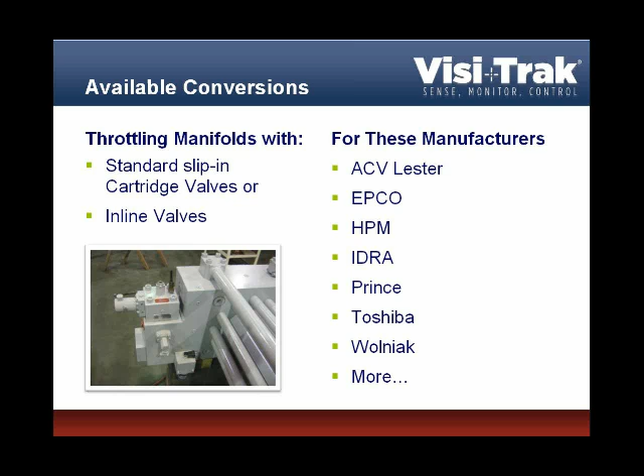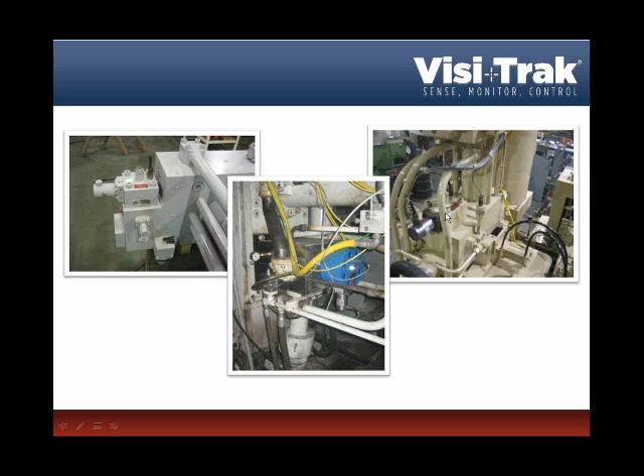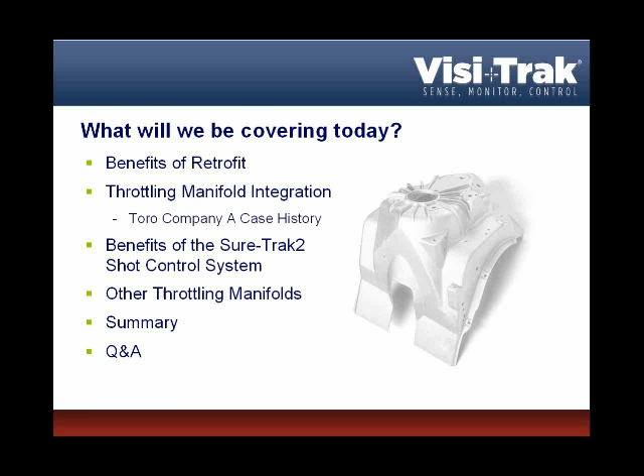Today we'll cover the benefits of retrofit from both a performance and a business standpoint. We'll look at a case history of a throttling manifold integration done at a Toro die casting facility. We'll talk about the benefits of shot control, look at some other throttling manifolds we have done, and a brief summary, and then if there are questions, we'll try to answer those.

Performance benefits: you can get an increase in shot speed capability from new throttling manifolds. It doesn't always happen, but it's not uncommon for there to be a speed increase. The efficiency of the cell is increased. Scrap typically is decreased, and with the ability to control acceleration and deceleration, we can minimize the impact force, reduce flash, and reduce wear and tear on the tooling and the die casting machinery.

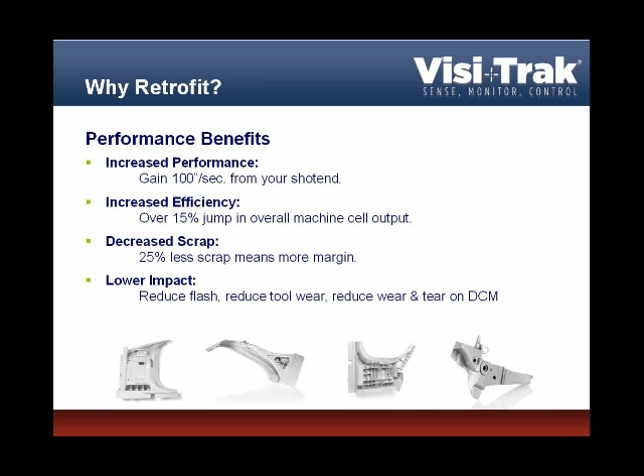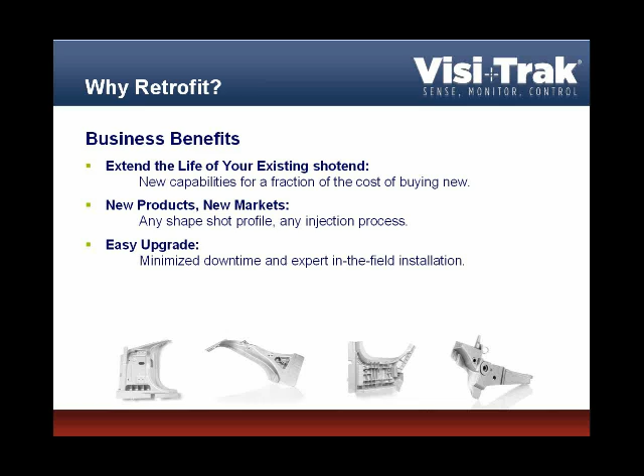From a business standpoint, it's far cheaper to enhance the capability of an existing shot end than to replace it. Once the shot system has an integrated throttling manifold and shot control system, it's now capable of any die casting process, squeeze process, or vacuum-assisted process. And these are easy upgrades, field retrofittable.

Let's talk about the Toro company, who has a manufacturing facility in southern Minnesota. It's a very high volume operation. It's been there for about 20 years, and like most plants, if you started out with a clean piece of paper today, it wouldn't look like the facility that has evolved after you've lived in it for a while.

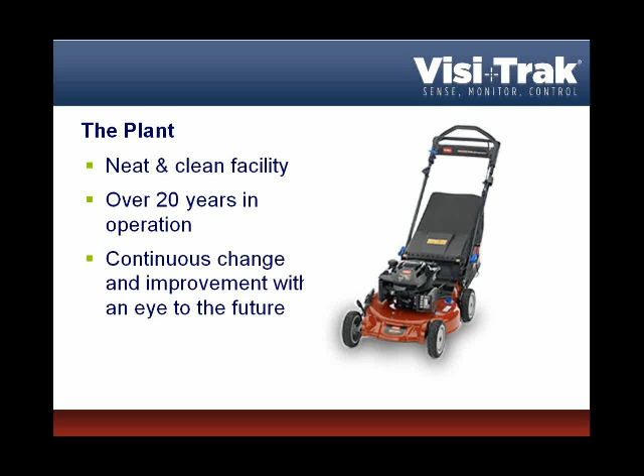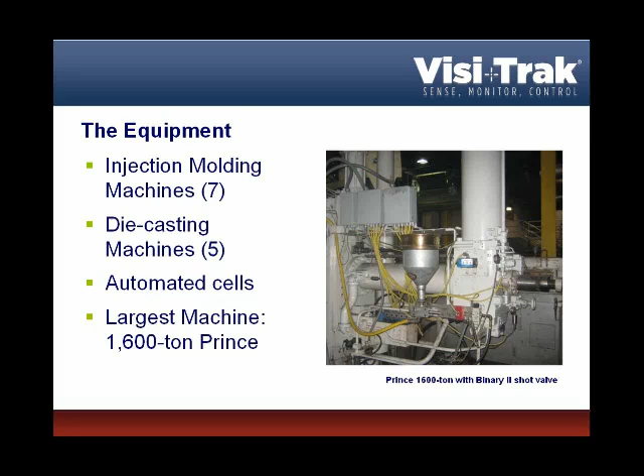But Toro has managed it well and modified the plant periodically with an eye to the future. They have a very lean staff here. It's a high volume production operation. They have 7 injection molding machines, 5 die casting machines, the largest one of which is shown here, a 1,600-ton Prince they purchased in 1990.

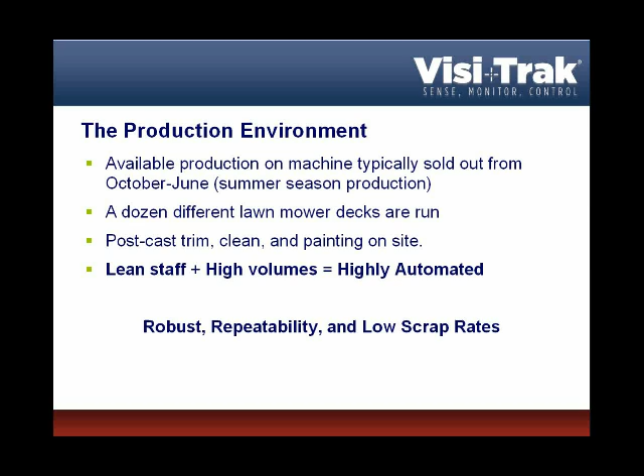This machine is typically sold out from October to June, where they're manufacturing summer season products. They have a dozen or so different lawnmower decks that they run, and at this operation they trim, clean, and do some painting. They also ship some decks to other Toro manufacturing facilities. With a lean staff and high volume, it's a highly automated operation, and it depends upon robustness, repeatability, and very low scrap rates to be efficient.

Since Toro purchased the 1,600-ton machine in 1990, the decks have generally increased in size, and the designs they're casting today are challenging the available clamp tonnage of the closing end of the machine. They also center shoot these decks, so there's limited space for the in-gate, and the metal has a long way to travel through the die. You'll see later we'll show a shot profile from an actual production shot, and they don't even use the intensification. They're just trying to get the metal into the die very quickly, and it's frozen off before they have time.

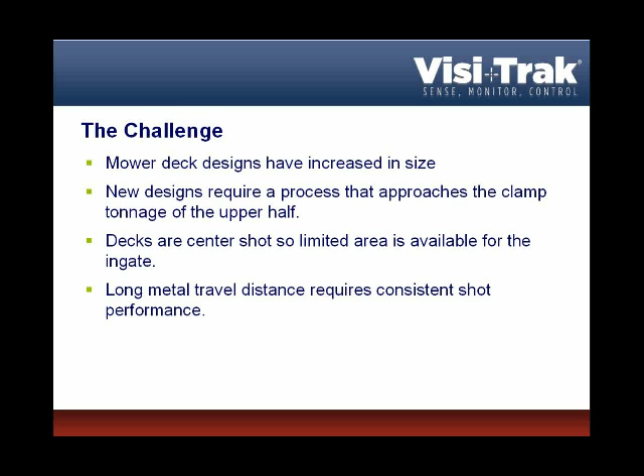So the 1,600-ton machine was originally purchased with a binary 2 standard 3-speed shot system. Toro upgraded the machine to add the ramping capability, but it had no low impact system. Here, a green arrow points to the binary 2 valve as it existed prior to the integration.

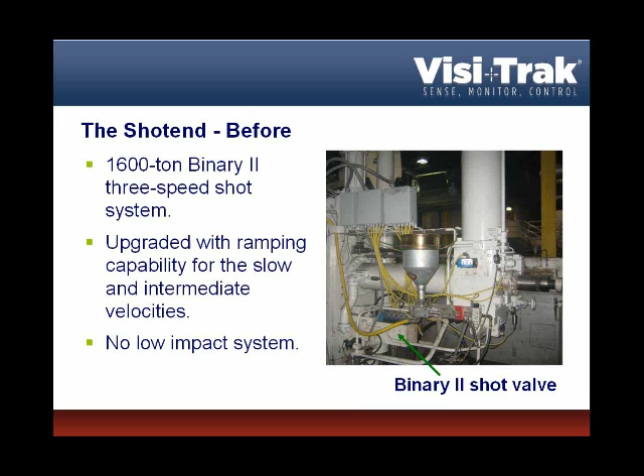Over time, Toro would develop an occasional cracked segment on the valve, which would impact the fast shot velocity. They also had issues where the segments wouldn't collapse properly, giving inconsistent shot speeds. Operators were then fussing with the fast shot settings, trying to maintain a stable process, and it caused a lot of variation and increasing scrap rate issues.

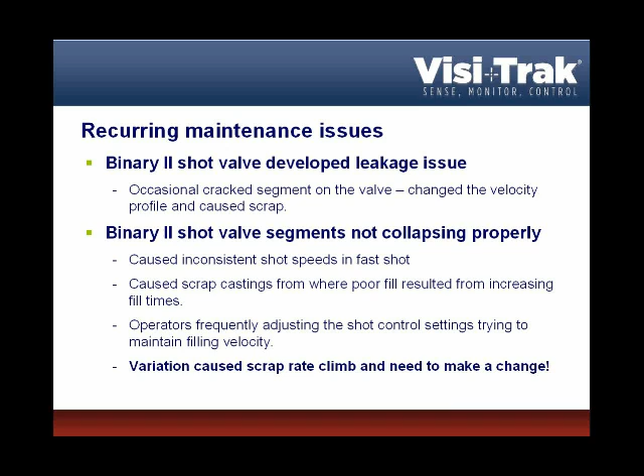So Toro decided they needed to make a change and considered a new shot end as an option. They decided they needed more speed to accommodate castings that were now challenging the original performance specifications to which they'd ordered the machine. They decided against a new shot end because it was very expensive, and came up with what they really needed: a more robust velocity control system and more speed.

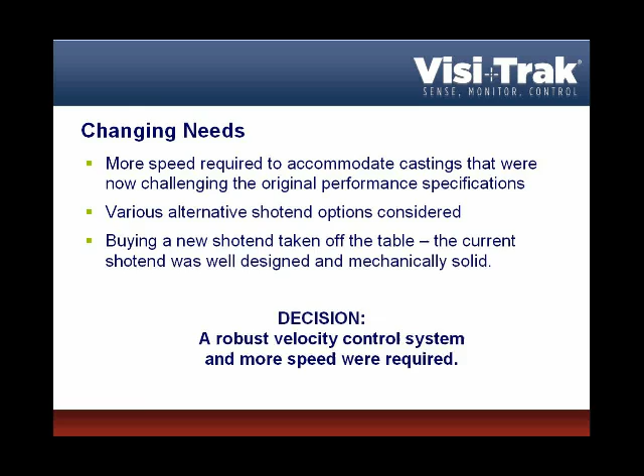So the solution was to remove the binary 2 shot valve and the manifold block on which it resides. A direct bolt-in replacement was designed and fabricated by die-cast press, with an 80-millimeter two-way throttling valve manufactured by Olmsted Products in collaboration with Visi-Trak.

It has a 30 GPM servo pilot valve, which you can see clearly mounted on the bright blue cover of the cartridge. It has a PO check. The manifold has a PO check to release oil from the main area so we can retract the cylinder. It has another cartridge to develop pressure on the rod side to retract the cylinder. And there's an inline, no-bypass pressure filter that gives final filtration of the oil passing through the servo pilot valve.

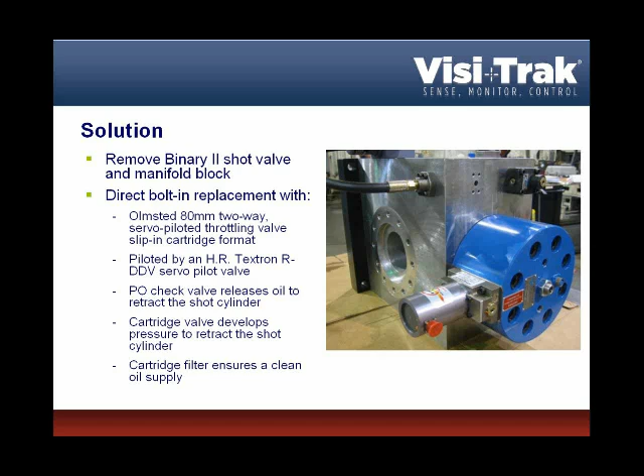And here's a shot of that manifold block. This is a direct bolt-in replacement. The servo pilot valve is an excellent design, manufactured by Textron. They're located in Southern California.

It is a unique design for a servo valve in that there's no hydraulic fluid flowing through the first stage of this valve. Traditionally, servos have had hydraulic fluid in the first stage directed to either the A or B port on the little four-way valve in the second stage, through very small orifices that have been points of contamination and points where contamination can clog up the servo valve.

This Textron RDDV design eliminates hydraulic fluid from the first stage, and instead there's a torque motor connected to an eccentric. As we apply current to the torque motor, it rotates, moving the eccentric and thereby shifting the spool in the four-way valve to direct flow to either the A or the B port.

So with this design, the point in servo valves that has traditionally caused them to be fussy is completely eliminated, and instead we have a very robust design that has been a proven winner in the die casting environment over the last 12 or 13 years.

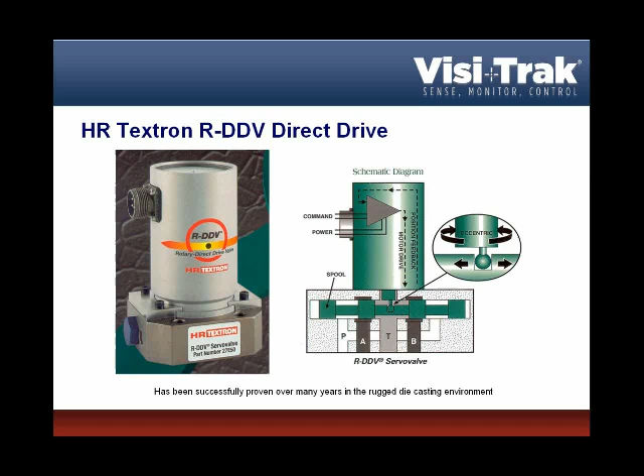The throttling manifold arrived at Toro on a Tuesday morning. Toro's own in-house crew did the installation. By Thursday afternoon, the manifold was bolted in place. All the original connections, which had been replaced with new fittings, were reconnected to the manifold block.

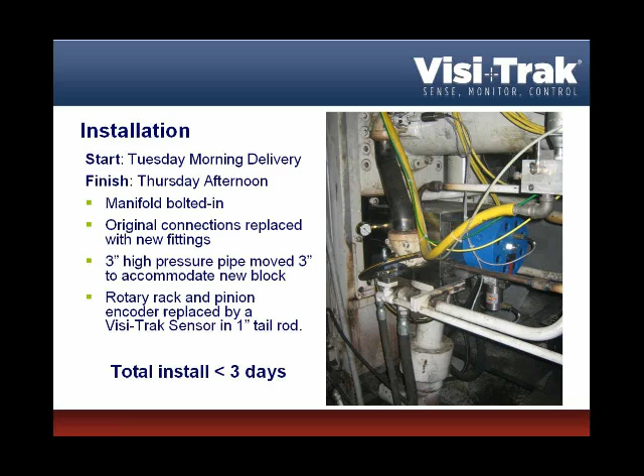This piece of high-pressure pipe that carries the discharge oil from the rod side of the cylinder down to the throttling manifold had to be fabricated new, because the inlet to the manifold had moved 3 inches further from the closing end of the machine with the new manifold block design. Toro also elected to replace the rack and pinion encoder with a Visi-Trak tail rod, a 1-inch diameter rod, with a very robust mounting. So the total installation was less than 3 days at Toro.

Here's a quote by Dave Brockman, the engineer at Toro: 'The new Visi-Trak valve increased our top speed by over 100 inches a second and has made it possible to continue creating cost-effective castings even after we outgrew the original capability of the machine.'

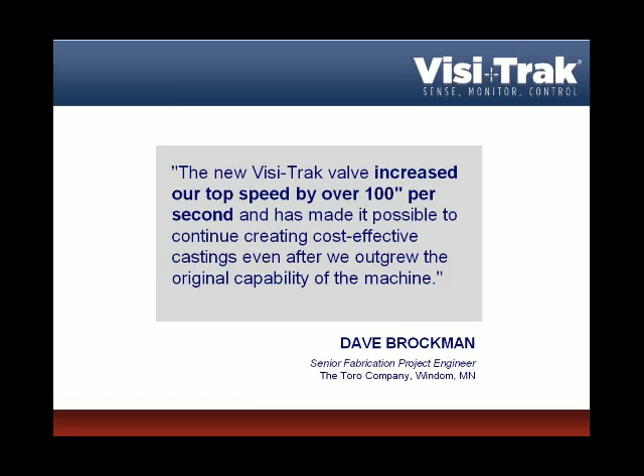Toro had retained the original runoff documentation from prints. In 1990, with the binary valve in the full open position, at an 800 psi accumulator pre-charge, the machine dry cycling would achieve 157 inches a second peak fast shot velocity. At 1,000 psi pre-charge, it would do 186. At 1,200, it would do 208.

When Toro charged the system up, the accumulator had 1,340 psi pre-charge, and with a 100% open loop command to the throttling manifold, the machine now had 309 inches a second velocity capability. Granted, that's not a perfect comparison - a 1,200 psi pre-charge would have provided a perfect comparison. They probably would have wound up with another 80 or 85 inches a second at 1,200 psi versus the binary valve. So they had a substantial performance increase. And here's a shot profile that I referenced earlier.

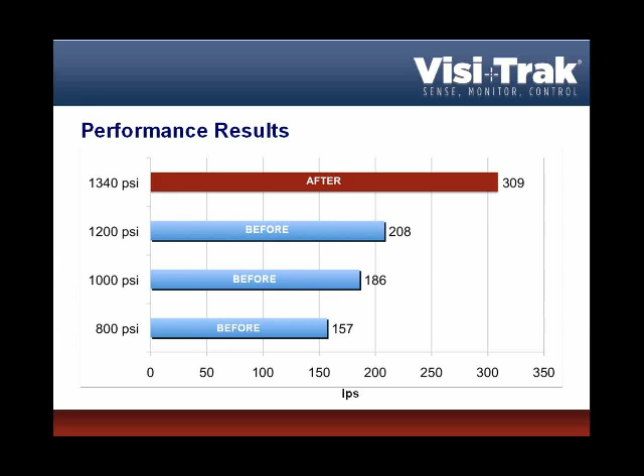They do a closed loop motion block to cover the pour hole, closed loop motion block in the intermediate phase, and then they do an open loop fast shot motion block. As the system extends, the piston is moving out, so the whole hydraulic system is extending. As it does so, it loses power, and you can see the fast shot velocity gently tapering off.

Had Toro elected to use a closed loop motion block here, that wouldn't have happened. But a good-looking shot profile nonetheless, and you see here, no intensification. The machine has an intensifier, they just don't employ it for making these big lawnmower decks.

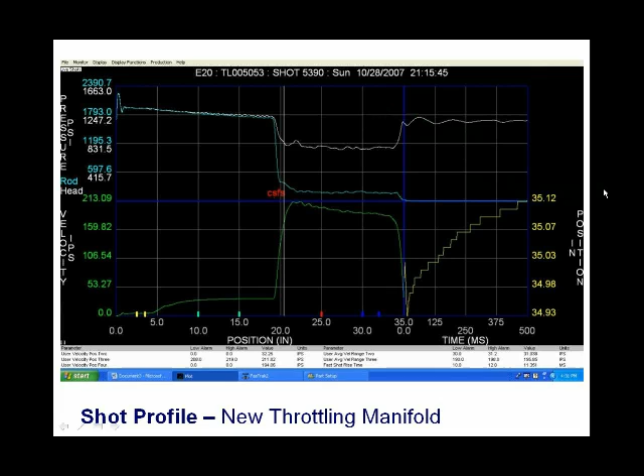So here is an X-bar chart, an average velocity was calculated from 10 inches to 15 inches of stroke, for 135 consecutive shots. There was a total range from the slowest average to the fastest average of 0.49 inches per second, yielding a CPK of 9.05. This is an extremely capable machine.

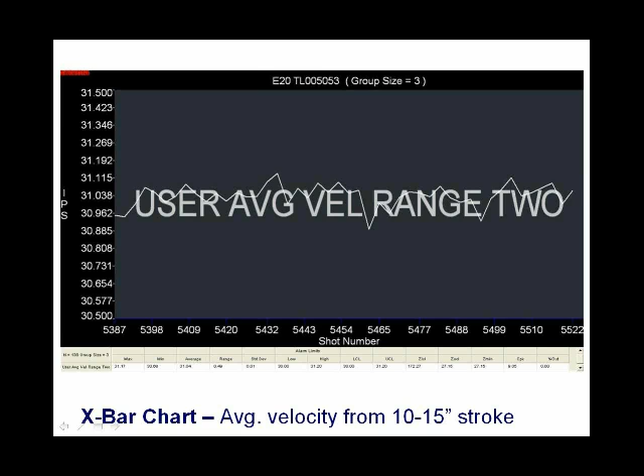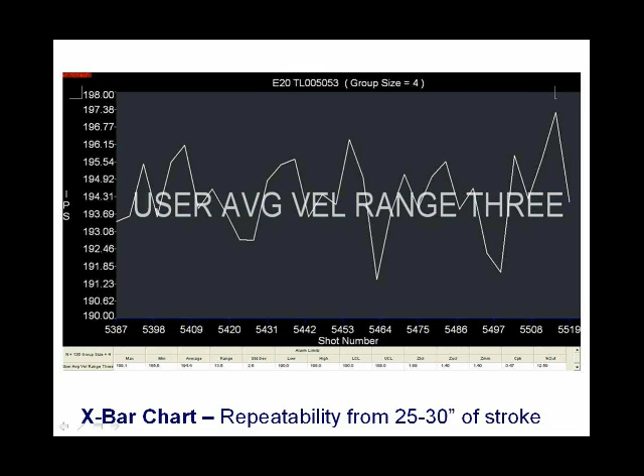Then we did an X-bar chart on average velocity during the fast shot. Because this was an open loop motion block, there was a bit more variation here, but nonetheless, it was very repeatable. And we did another X-bar chart on fast shot rise time.

This was the elapsed time for the shot cylinder to accelerate from 35 inches a second to 190 inches a second. There was a total variation of less than 1 millisecond in the rise time for 135 consecutive shots, once again yielding a very capable machine.

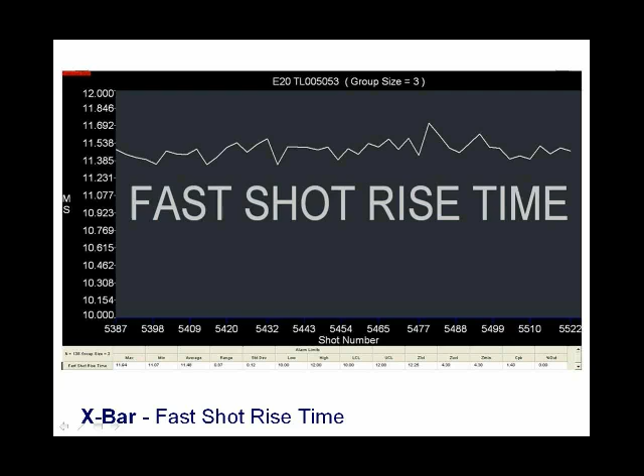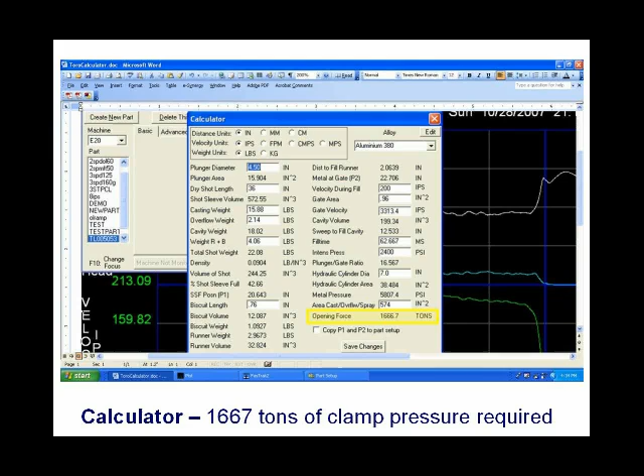And here's a screen showing the calculator program. It's a process calculator program. We show down here the deck Toro's making and the process that they've identified in the calculator here. Shows they need 1,666 clamp tons. So they're just challenging the very limit of the tonnage capability of this press.

A post-audit of the installation revealed that they're now able to easily make all these lawnmower decks on the machine that they have. They have outstanding velocity control. The overall equipment effectiveness increased by 15.5%.

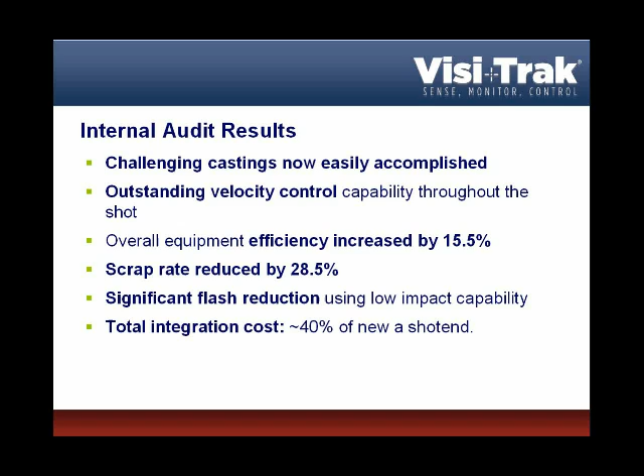They had a pretty significant scrap rate reduction. Now, it was already a fairly low scrap operation, but they were able to reduce the scrap even lower. They've largely eliminated flash from these big lawnmower decks, and the total integration cost was about 40% of the cost of a new shot end.

And another quote from Dave Brockman: the retrofit package in Visi-Trak 2 has given us a shot system with outstanding control and performance. This economical solution extended the service life of the machine and helps us continue to make cost-effective castings after they have outgrown the clamp tonnage capacity of the machine. It's a lot of bang for the buck. Can't say it any better ourselves.

This screen shows a modified packing retainer gland, which is accommodating the Visi-Trak sensor. The piston rod on the machine has been modified, and then this packing retainer gland design by die-cast press is excellent. It involves a long bearing surface that extends back into the cylinder, which eliminates any sagging of the shot cylinder as it extends outward.

It means then that the rod traverses back and forth in a very straight path, and this bronze block that you see can easily be removed so that the bidirectional transducer can be installed and gapped properly, and then that bronze block can be reinserted into the nose of that packing retainer.

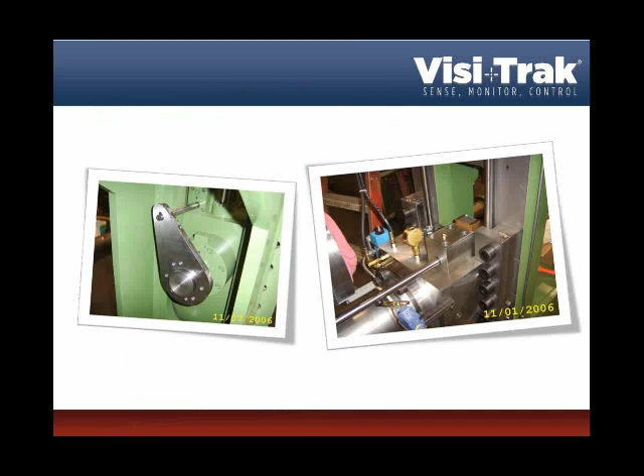Many machines have a tail rod on them, and the most immediate, cost-efficient way to integrate a Visi-Trak sensor is to replace the existing tail rod. Once again, we have a very nice design by die-cast press.

You see here in the photograph on the right, there's a bearing block which has a bearing pressed into each end of the block. This guides the tail rod very straight as it traverses back and forth. This block has zerks on it so you can grease those bearings.

And then in front, a bronze block shown in the photo on the left. The front side is painted. The photo on the right, the back side is unpainted. That's a bronze block. It accommodates the bidirectional transducer.

And then at each end, this end of the bearing block, and then this end in the left-hand photograph, the front face of the sensor mounting block, those also have those metallic wiper rings on it, which keeps the rod nice and clean and prevents any type of stuff from the foundry from getting underneath the bidirectional transducer. Also shown in the left-hand photo, the puller bracket, a good, strong design by die-cast press.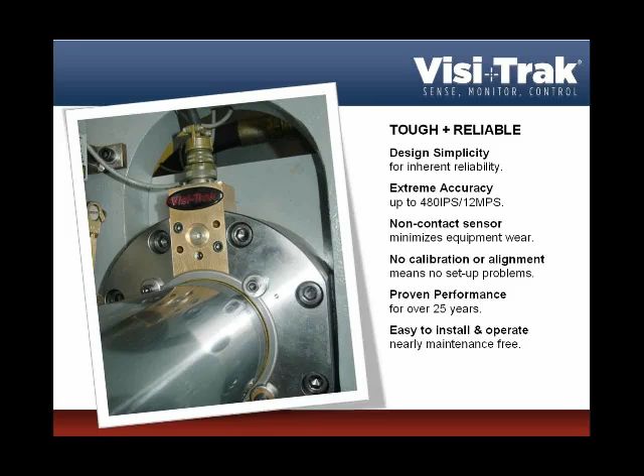So we've shown in this slide a superior design for Visi-Trak sensor installation on the cylinder rod, and here a superior design for installation of a Visi-Trak sensor in the form of a tail rod.

Our Sure-Trak2 shot control system is our 5th generation of closed-loop motion controller. It is really just a beautifully refined product now. Earlier generations could require that a technician check various points with the voltmeter. Now all the diagnostics are done right from the user interface, pushing buttons on the keyboard, including nulling of the servo valve. All the tuning is done digitally today. There's no pots to adjust. So this is really a nicely refined system for the die casting application.

The benefits of integrating control are to take advantage of Ohio State's 1991 research that showed the ability to minimize air entrapment during the slow and intermediate phase with a constant acceleration ramp. You can create any shape injection profile to result in smooth metal flow, outstanding repeatability. It has the ability to decelerate the system to reduce the impact spike. It's programmable in engineering units, not two turns of a valve, which is different for everybody, but actually programming the control in engineering units, which are easily stored on the computer and easily recalled to set the shot end up again. And it's easy to retrofit onto existing machines, or you can specify it on your new die casting machine.

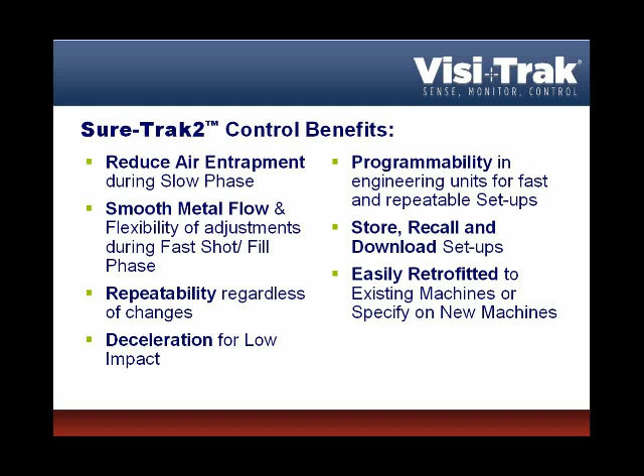And here's an example of how to program a shot profile. We're telling the control to accelerate from 0 to 80 inches a second over 16 inches, and to maintain that velocity to 17 inches. And then the next motion block, we're calling for 250 inches a second, as quickly in a closed loop mode as the system will accelerate. And at 25.5 inches, we're closing the throttling valve to decelerate the system. There's the resulting event.

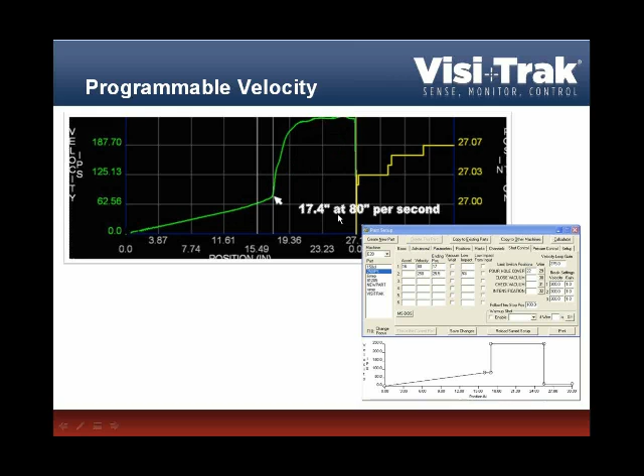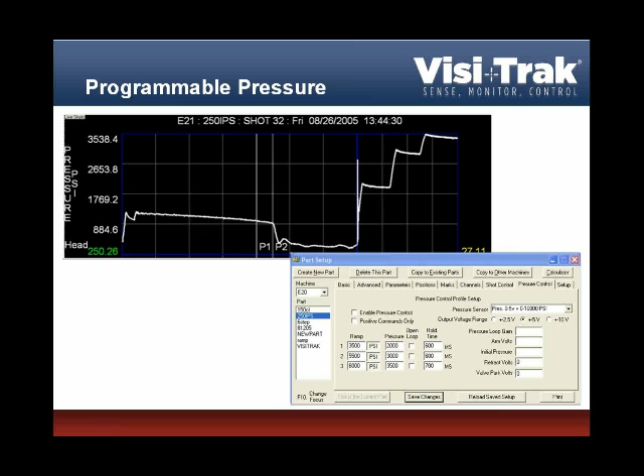And the Sure-Trak2 has 2 axes of closed loop control. And we use the second axis to provide a programmable pressure control during intensification. We're using a special command to get the system to react as quickly as possible. So we're telling it to go to 3,500, but our actual target is 2,000 psi, and hold for 600 milliseconds. And here you can see it's right at 2,000 psi for 600 milliseconds. Then we asked for 3,000 and hold for 800. We asked for 3,500 at the end and hold that for 700 milliseconds. So there's our programmable event, all done in engineering units.

Here's another shot profile display where we're plotting on top the command from the control to the throttling valve in blue, and then the LVDT response from the throttling valve in white. So you can very clearly see how the response from the LVDT very, very closely follows the command, and of course the resulting velocity profile looks essentially like the command signal. Here, the command to decelerate the system, close the valve, and here you see the valve closure happening 4 or 5 milliseconds later and bringing the shot system to a gentle landing.

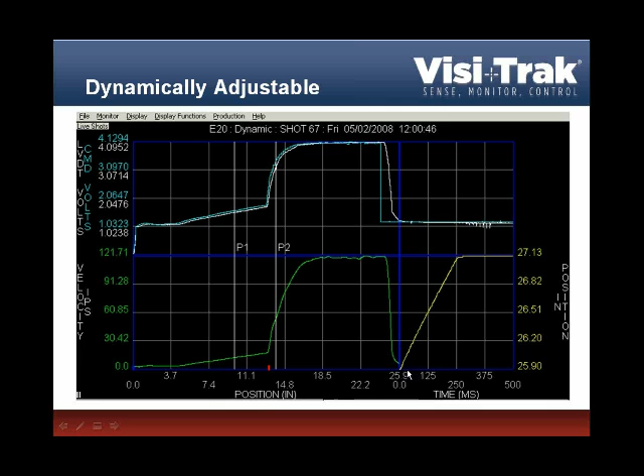Here's 10 shots overlaid. And here's 3 different shot profiles. The one on the left, from a 2,500-ton Idra at a 100 millimeter bore shot cylinder, was capable of accelerating from approximately 11 inches a second to 327 inches a second, a delta of 315 plus, in 16 milliseconds. I'll show you the picture of the throttling manifold that generated this performance.

Then the upper right is a 1,750 metric ton Z-tie machine that has our throttling valves and shot control system completely integrated into the machine. You're seeing almost 11 meters per second velocity here, but once again, excellent acceleration and deceleration capabilities.

Here's a shot profile from a German customer that uses a long, slow shot as they pull a vacuum on the die, and then a very short, fast shot to inject the metal into the cavity area. Once again, excellent acceleration and deceleration capability.

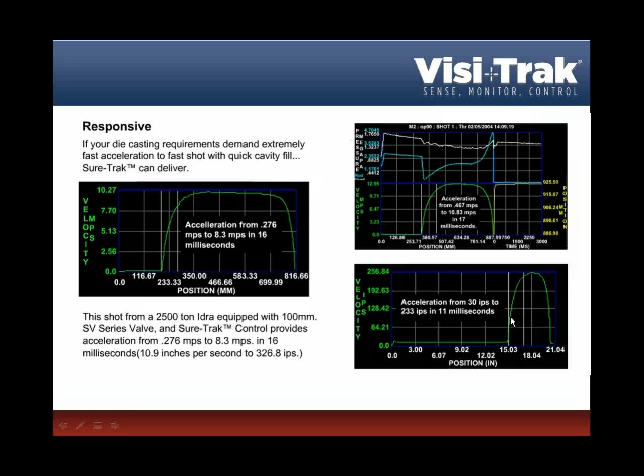So let's look at some other integration designs. This is the new front head on an HPM machine. This particular one is on a 900-ton machine. It eliminates the POC, which was a proprietary HPM design. It performs pretty well when it's new. The very low-speed shot control isn't as good as this Olmsted two-way servo-piloted valve. And, you know, the POC doesn't hold up as well. It's a design from yesteryear that has just been very much improved upon by the genius of Pete Olmsted.

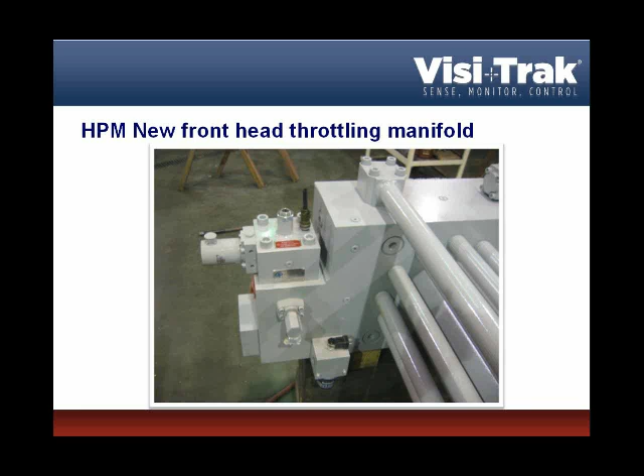So this new front head is a die-cast press design for an HPM Model 2 or newer shot end. It eliminates the POC. It integrates the Olmsted two-way standard slip-in cartridge throttling valve, which is easier to tune, more robust, and has better velocity control.

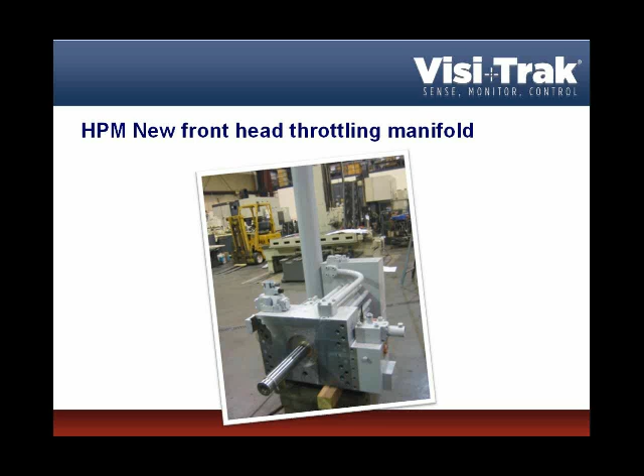So the advantages of the new front head, once again: eliminates the POC, integrates an Olmsted two-way slip-in cartridge valve that has been designed for this die casting application, and goes like a rocket. It's very robust. There's outstanding velocity control throughout the entire speed range of the machine.

The reinforced packing retainer gland ensures not only a robust and long life to the cylinder, but it makes the rod traverse back and forth in a straight path, and therefore the Visi-Trak sensor then becomes an extremely robust velocity sensor.

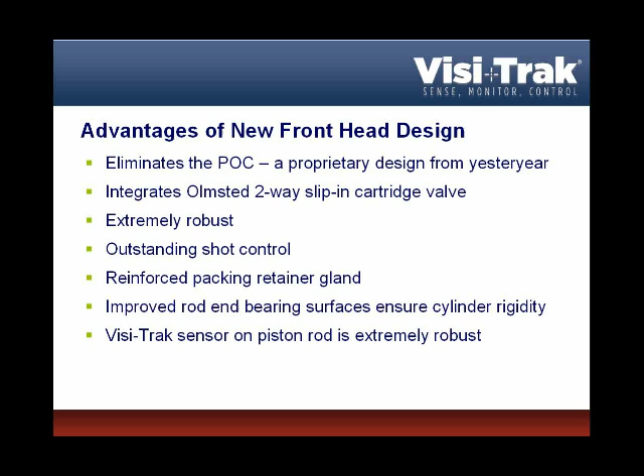This is an image of the throttling manifold for the 2,500-ton IDRA. We showed a shot profile from this previously. The manifold bolts directly to the exhaust port on the IDRA cylinder. This bolt pattern matches up to the exhaust port on the IDRA shot cylinder, and it resulted in a machine with excellent velocity control and really fantastic acceleration and deceleration capability.

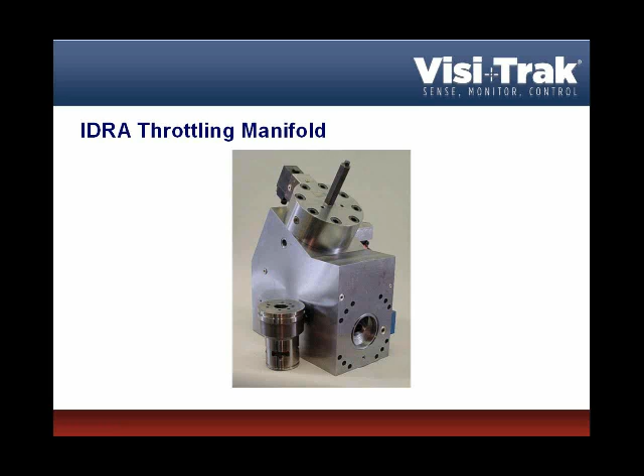There's the event. A delta of 8.3 meters per second, that's roughly 330 inches per second, acceleration in 16 milliseconds.

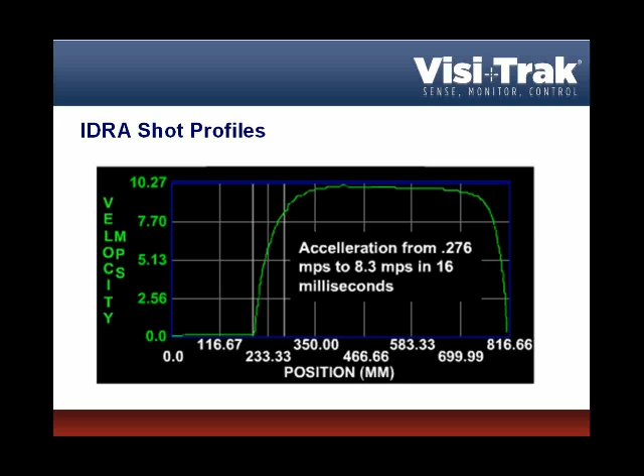This is two images shown here of an inline design. It is a 50 millimeter two-way throttling valve in a cast steel body. We see here the mounting footprint for the servo valve, and this valve facilitates the hydraulic integration on some shot end designs. It's shown here on the right, integrated onto a Wolniak shot end. Those of you that have a Wolniak shot end will be familiar with this.

The speed valves for slow and intermediate are removed from the rod side manifold, and covers are made for those. Then the fast shot valve is removed, and the two-way throttling valve is mounted at the discharge port for the fast shot valve. So now all of the oil exiting the rod side of the shot cylinder must pass through this valve to get back to tank. The entire shot is controlled by modulating the discharge of oil through this throttling valve back to tank. It's a very inexpensive means of integrating an excellent velocity control system onto an existing piece of hardware.

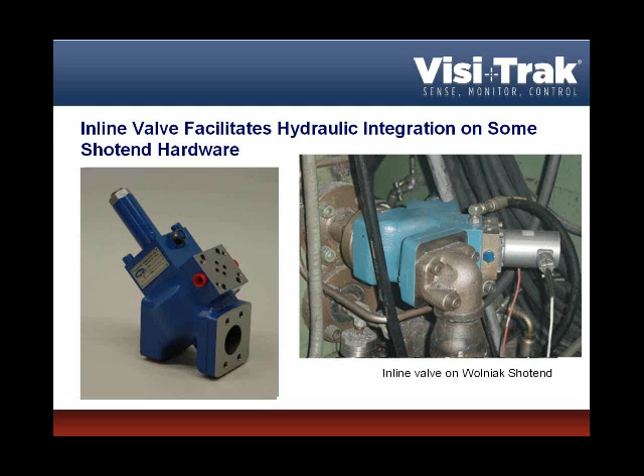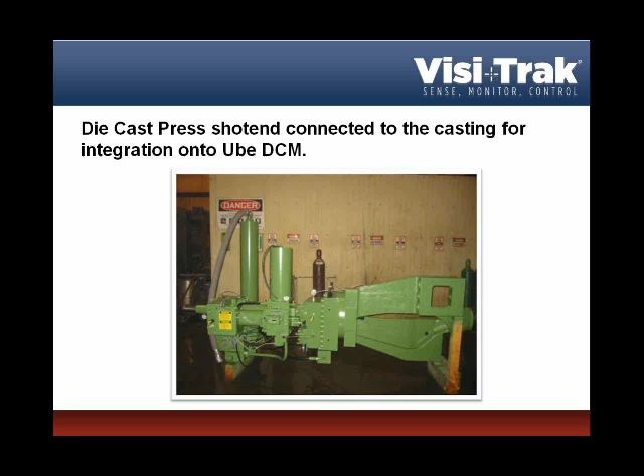Here's a shot end designed and manufactured by Die-Cast Press. It's bolted to the casting that is part of the UBE design for connecting the shot cylinder to the closing end of the machine. The customer was happy with the upper half of the machine, which was still in good shape, but needed a better shot end and better velocity control. They achieved that with this new shot end integration designed by Die-Cast Press.

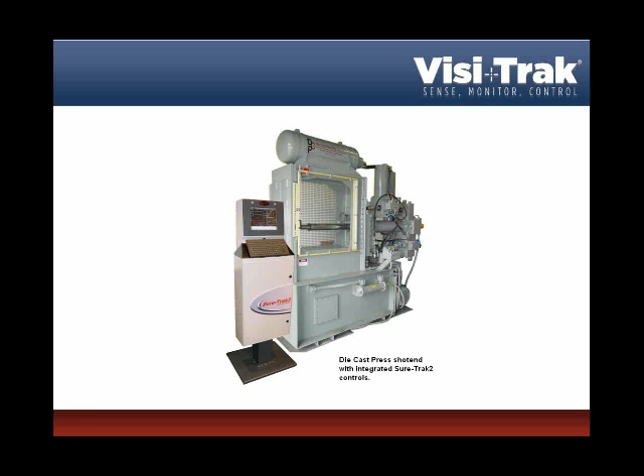And here's a Die-Cast Press shot end. This resides in Visi-Trak's facility in Cleveland, Ohio, and we use it for training, for testing new valve designs, and it's been an invaluable piece of equipment.

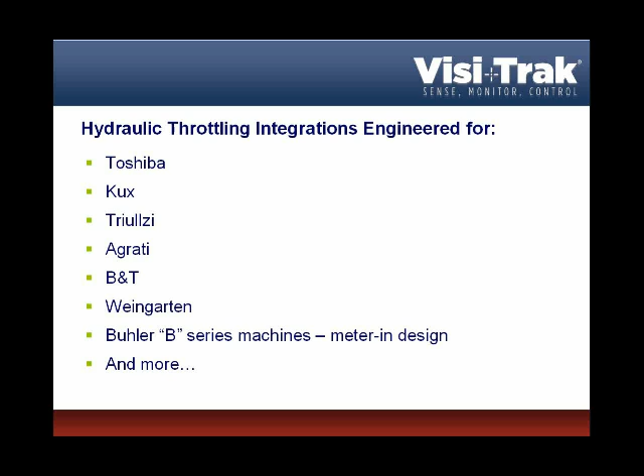In addition to the 4 examples of integration that we've shown, which was the Prince, the HPM, the Hydra, and the Wozniak, throttling manifolds and Visi-Trak controls have been engineered and installed on Toshiba, Kux, Triullzi, Agrati, B&T, Weingarten, Buhler B-Series machines, and quite a few others.

In summary, the integration of new throttling manifolds enhances the capabilities of the existing shot system. They are field retrofittable. The flexible control lets you run any injection profile. It's typical that a velocity increase in the shot system can result, and it's always less than half the cost of a new shot end.

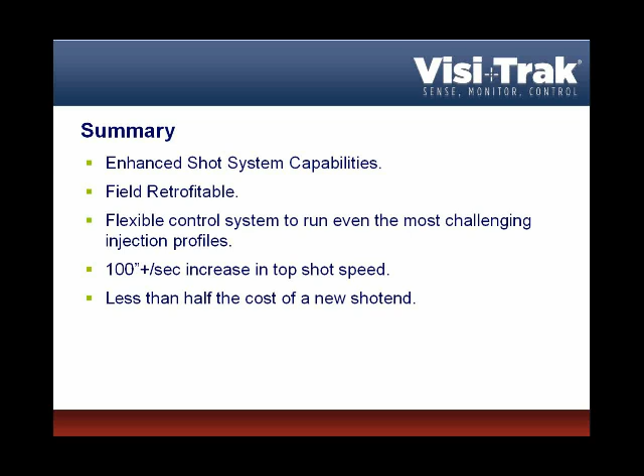And finally, Visi-Trak has developed an HMI, which is a graphical interface to the PLC. It's an option to any Sure-Trak2 or True-Trak20/20 monitoring system, and it lets the user run the entire die casting machine from their Visi-Trak system.

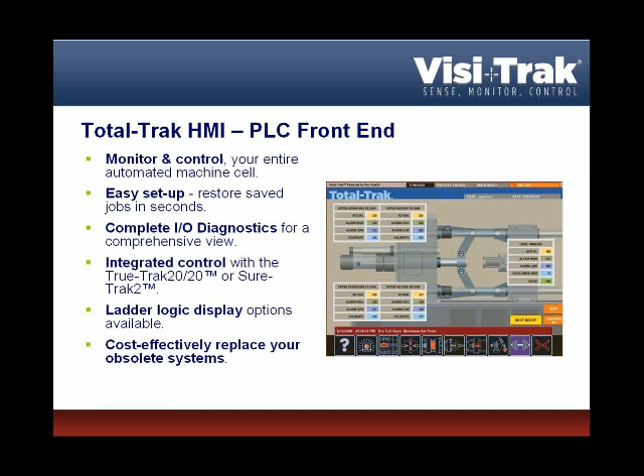It lets you control the entire cell, easy to set up and save those setups. When you save the setup, it's automatically backed up to the data archiver, and there's ladder logic display available. It's a very cost-effective replacement for your existing systems which are reaching the end of their life cycle, such as a Pro Manager or HPM's HMI.